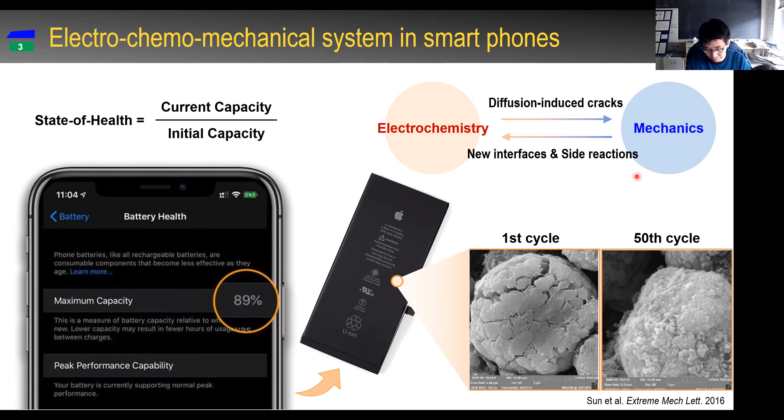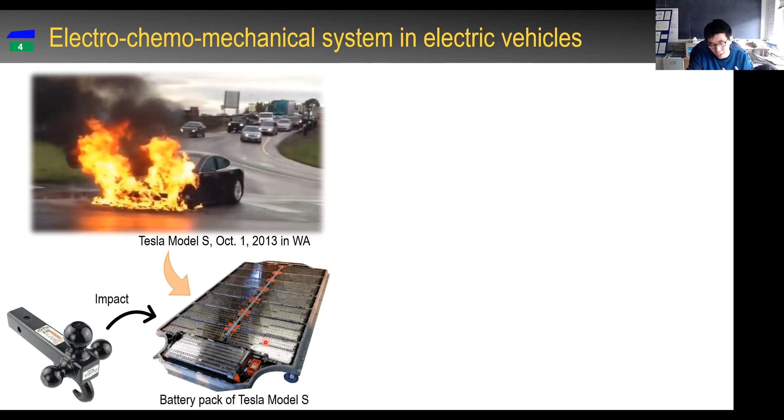Another example of an electro-chemo-mechanical system is electric vehicles. You must have seen this famous photo in headlines, about a burning Tesla, I think in 2013. What happened to that Tesla Model S? According to their report, a tow hook from another truck hit the bottom of the Tesla car, and several batteries deformed, severely damaged, causing an electric short circuit and thermal runaway.

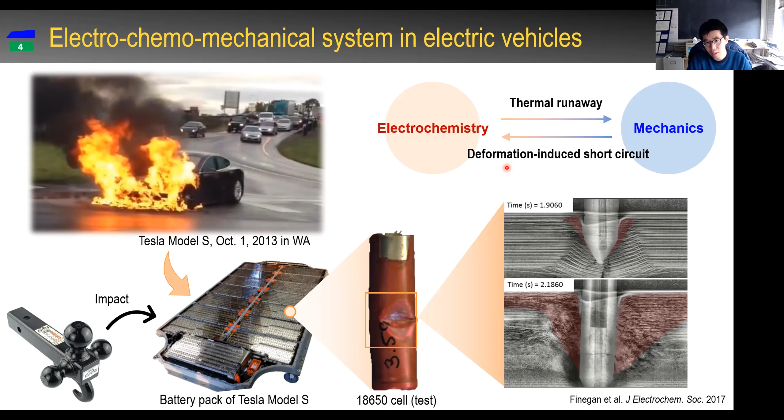So in this case, it's also mechanics and electrochemistry interacting with each other. Mechanical deformation happens first, and that deformation induces a short circuit, and there are side reactions of electrochemistry, causing thermal events and uncontrollable thermal events called thermal runaway. It can also go back to mechanics, like thermal events causing other severe large deformation of batteries. So again, in this case, it is the interaction. From these two cases, I think you must have a feeling that both cases are dealing with batteries. So that's actually one of my key research interests.

This kind of system is very complex. There are three sources of complexity of electrochemo-mechanical systems. The first one is multiple scales.

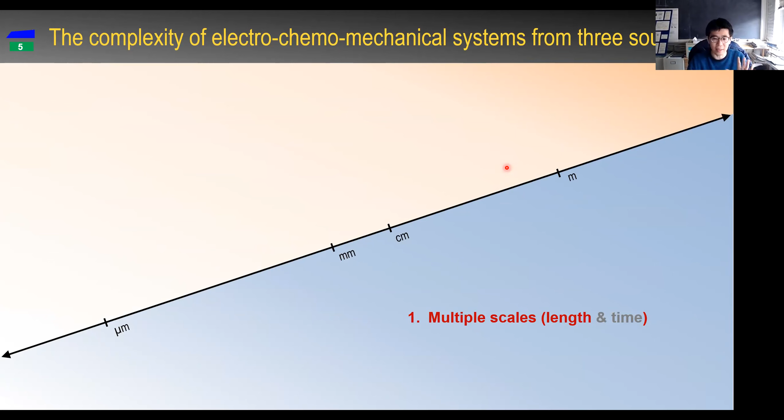Using a battery system as an example, there are multiple scales, from the nanoscale of the interfaces, to a single particle, and a lot of particles forming an electrode, what we call microscale and mesoscale battery components inside one battery, and cell level, going up to the macro level with battery modules, battery packs, and transportation. Transportation is well known as a complex system, and you can see a lot of scales here.

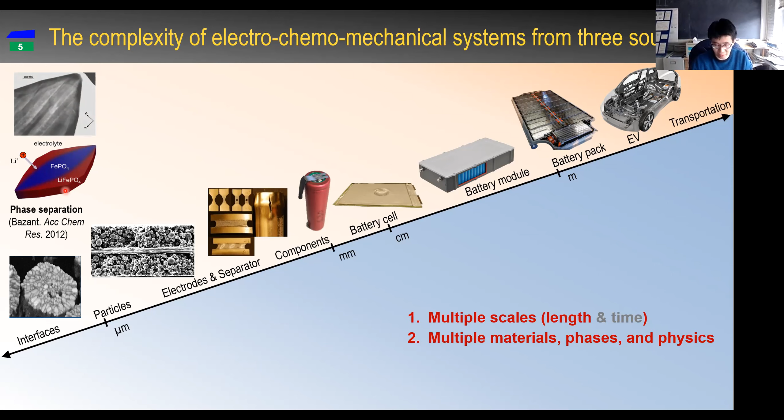The second source of complexity is multiple materials, phases, and physics. Just to name a few: at particle level, you may see phase separation during charge and discharge - one single particle is not charged uniformly, which is called phase separation. At electrode level, we can clearly define electrochemistry, and mechanically we have plasticity of granular materials - it can flow. This is another physics we want to look at.

There are much more, so it's definitely a multi-physics problem. The third complexity is usually called the curse of dimensionality in data science, meaning the complexity of the whole system increases exponentially with the number of variables and degrees of freedom. Our team is able to develop FE models at different scales, but it's very hard to develop one uniform model because of this curse of dimensionality. Today I will show you a real world example of how this curse of dimensionality is limiting us.

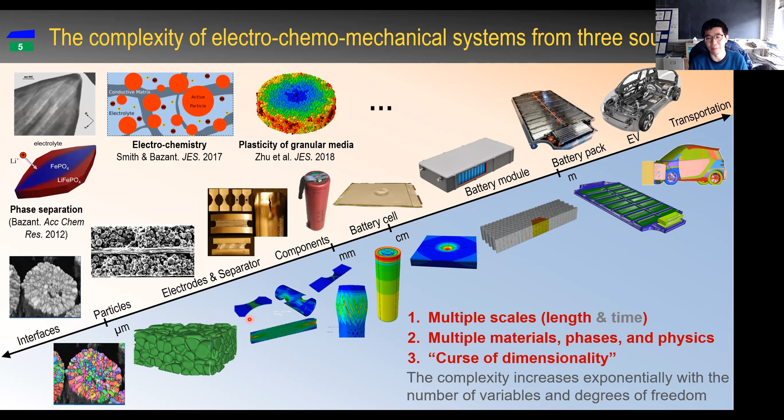These systems are usually complex. So what is the fundamental challenge if we want to characterize or engineer such systems? To me, the fundamental challenge here is the trade-off between physics and data.

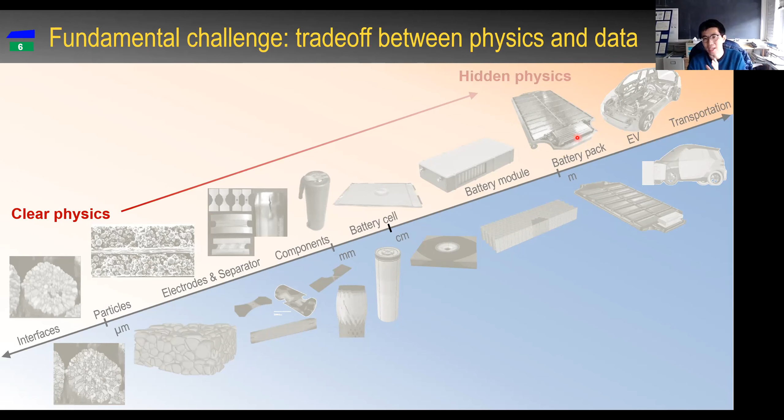As I showed you some examples of physics, you can see a lot of physics can be defined in the small range, at the nanoscale and microscale. That's actually what we usually observe - physical laws can usually be clearly defined and written down at small scales. However, at macro scales, for example car level, this kind of physical law is usually hidden and cannot be seen easily.

The good news is at macro scale we have more and more data, and big data is now a very hot area. Big data from EVs is being talked about every day. The good news is big data generation and storage is now kind of affordable to us. So data is big and affordable.

However, at micro scale, data are usually small and expensive. Just take this example of a particle - this one single image took my colleagues at NREL about one month to obtain, just a single photo of one single particle. So that's a lot of effort, meaning the data is expensive.

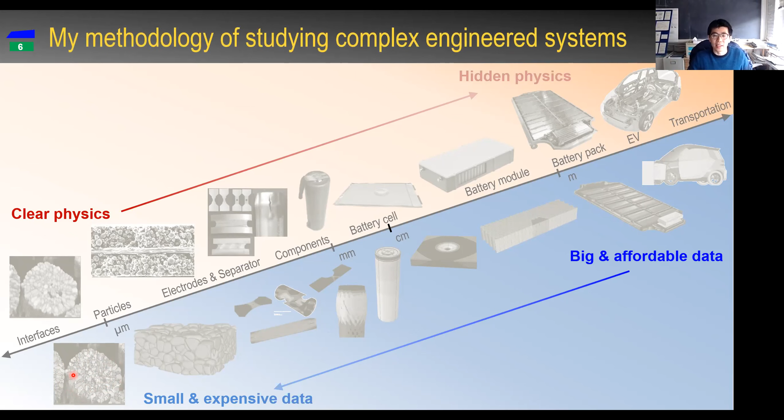My methodology for studying this kind of complex engineered system has three aspects. At micro scale, we learn electrochemomechanics or physics from small experimental data, because here physics can be written down clearly, but data is small, so we want to make full use of the data. At macro scale, we also develop data-driven health and safety prognostics for complex engineered systems.

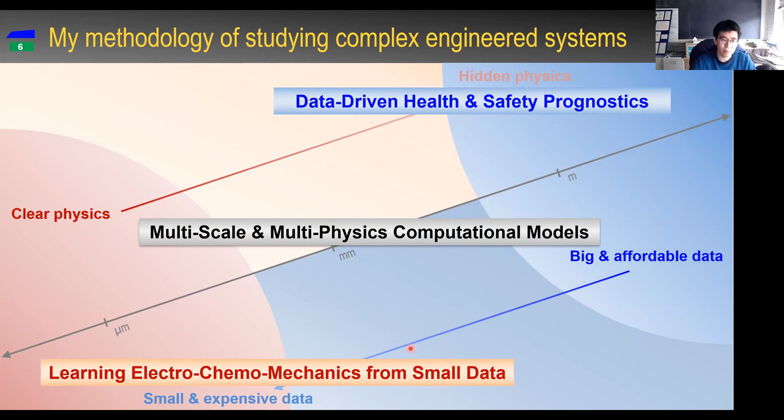In the mesoscale, the wide range, we develop multi-scale and multi-physics computational models. These three aspects are connected with each other. Usually, if we learn physics first at microscale or nanoscale, implement it into a model, and use that model to do model-based prognostics, that's a traditional physics-based roadmap - physics here, predictions at large scale.

There are other ways to do this. If we have a lot of data, we can do data-driven analysis first to get the trend, and use that to guide the design of computational models. These models can then predict mechanisms at small level. So this is a typical data-driven approach.

This goes back to the title of my talk: how to combine a data-driven method with a physics-based roadmap is a big challenge that we want to look into. In today's talk, I will give you two examples to show how these two interact with each other and how to find the balance between them.

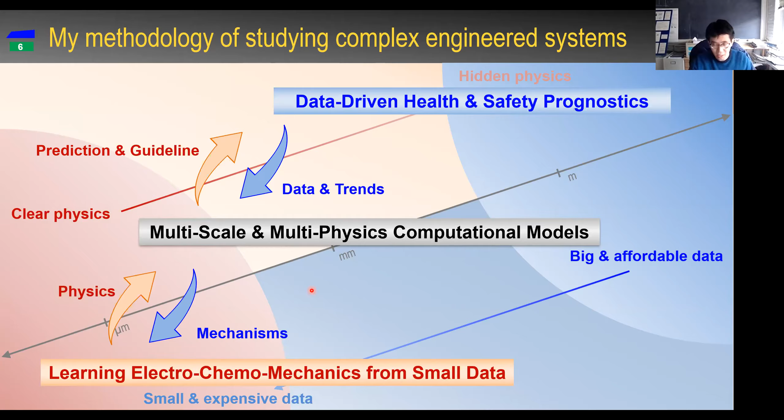The first part is from mesoscale to microscale, which involves implementing some physics into computational models of porous electrodes and the battery cell.

Before that, let's talk more about what a lithium-ion battery cell will be, or what can be modeled for a lithium battery cell.

Now in the commercial market, there are different kinds of batteries. For example, cylindrical batteries have been used by Tesla for quite a long time. This kind of prismatic cell is now being used by many cars. LG Chem developed this kind of battery, and Samsung developed this kind too. GM and Ford all use this kind of battery. And pouch cells, you can probably easily find in your cell phone.

So pouch cells have different form factors, but in terms of the basic structure, the fundamental structure is really very similar.

This is the solid skeleton of one unit cell, let's say an RVE, the smallest representative volume element. In one smallest unit, there is cathode and anode, the two electrodes, and usually those particles are attached to metal foils acting as current collectors. Between the anode and cathode there is a separator, usually a porous polymer. So this is the structure.

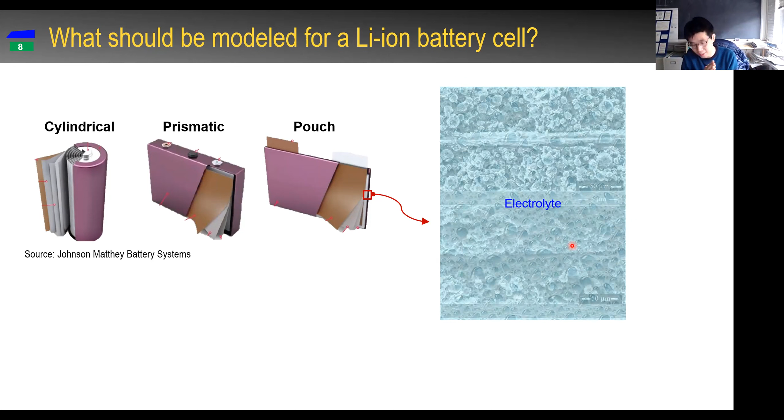All the solid materials in commercial lithium batteries are saturated in a liquid electrolyte. During charge and discharge, there is mass transfer and also transfer of electrons, so there is electrochemistry.

With this understanding, we can write down an equation, let's say the battery modeling equation. A lithium-ion battery model has three parts: one is the mechanics, the solid mechanics of layered porous media, and we need to know the flow of liquid electrolyte plus electrochemistry. So you can see a lot of physics here already.

In the first part, I will use this equation a lot to show you how I develop the model. So let's start from the mechanics of layered porous media.

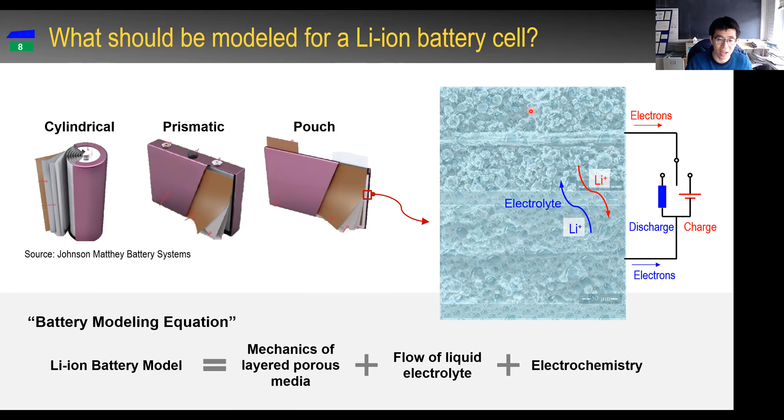To really develop a good model for this solid skeleton, we have to test a lot. We have to test all the components. There's a fancy word called learning - we have to learn mechanics from component-level testing. Our team has been working on this for about 10 years.

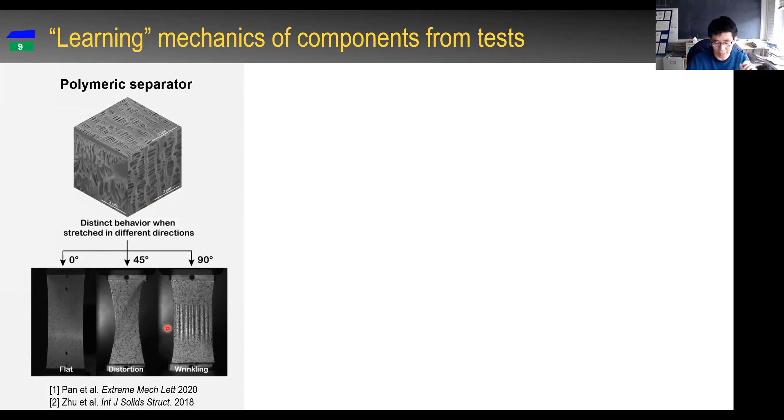Our team has almost tested everything, like the polymer separator. We did reconstruction of the polymer and tensile tests for the separator. We also tested the shell casing, the enclosure of the battery, and the current collector, which is the aluminum and copper foils.

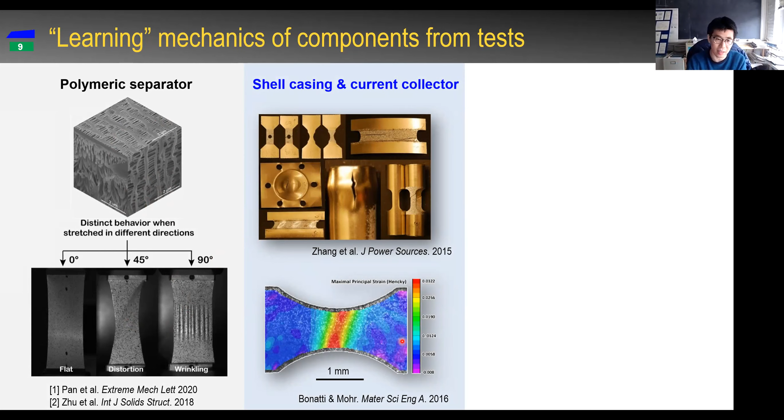Recently, my collaborators and I tested the active granular material. This is a core material in the battery system because this is where the reactions happen, the interfaces. With this testing, we can calibrate models and implement these mechanics into the RVE, the smallest unit cell.

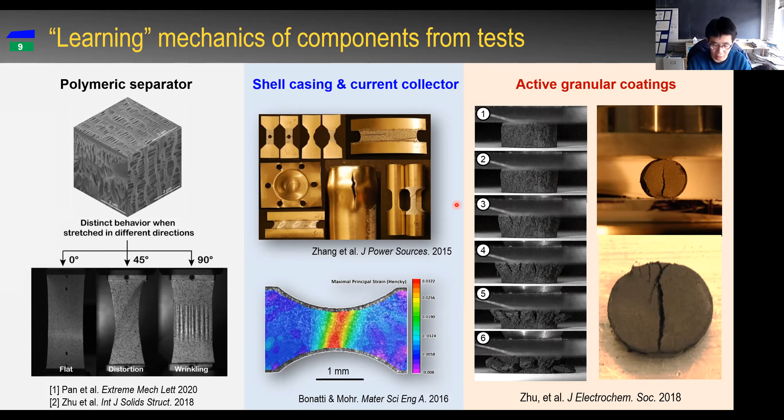This is something we developed - it's a cross-section of a model. We simply put layers together and give the mechanics into each layer. This kind of model's smallest unit is like this, and each layer means each component material, with constitutive laws given into each material.

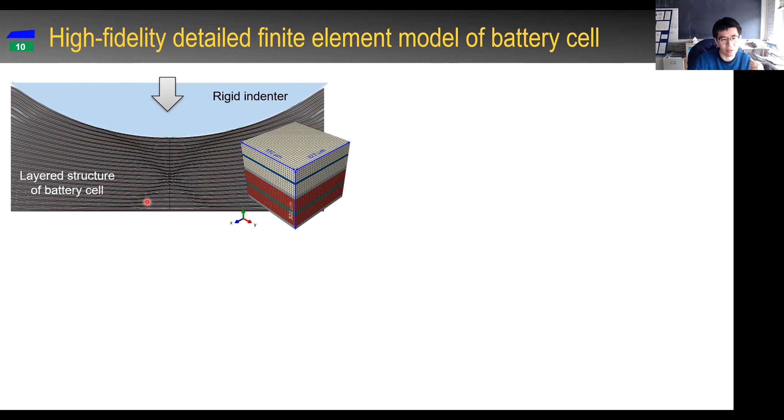This is a simulation result we call indentation. This is the indenter, a rigid indenter, and the battery layered structure deformed in this way. We can see clearly there is strain localization here, which is very interesting. We can also measure the force and displacement of this rigid indenter.

What will be the electrolyte contribution? One possibility is that if we do an indentation test, we will see electrolyte being squeezed into the neighboring parts instead of the localized region. So there will definitely be deformation-driven flow of the liquid electrolyte.

To validate this effect, we performed several uniaxial compression tests on the solid skeleton. We did 5 different loading speeds of the compression test on this unit cell, and we measured the nominal stress-strain curve.

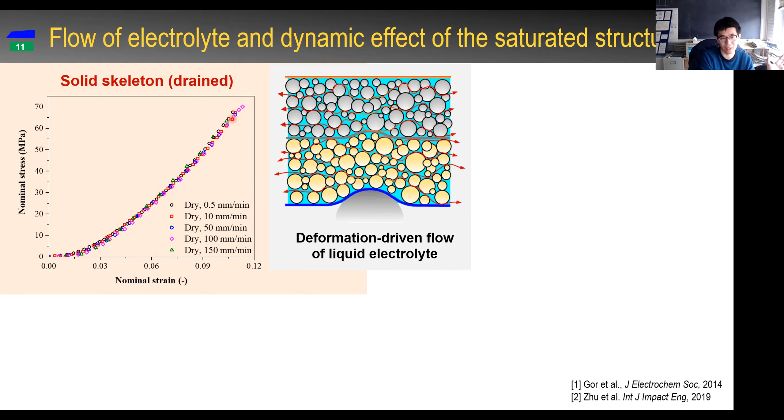We can see the dry material - the curves are almost identical, meaning there is no contribution from the electrolyte. However, if we do a saturated porous media with electrolyte, we see clearly there is a strain rate or speed effect, a dynamic effect. We put the dry curve here, and that means at a very low speed, the dry and wet curves are the same.

So in order to capture this phenomenon, let's revisit the battery modeling equation. We have the mechanics of solid, and we gave it a simplified mechanical model to capture the flow of electrolyte. Here are two simple equations, just to give you an example: how we update the stress, and we use Darcy's law to capture the flow in porous media.

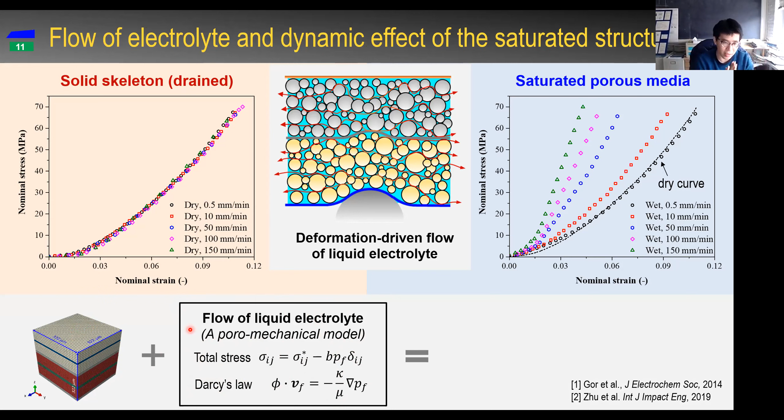There are many more equations that I'm not listing here, but simply putting these two together can give us some very good results, for example for simple geometry like uniaxial compression. The dashed lines in this picture are what we obtain analytically, and we have very accurate predictions of the strain rate effect. However, if we want to extend it to more complex geometry, using computation software like ABAQUS, it cannot continue to give us a good result.

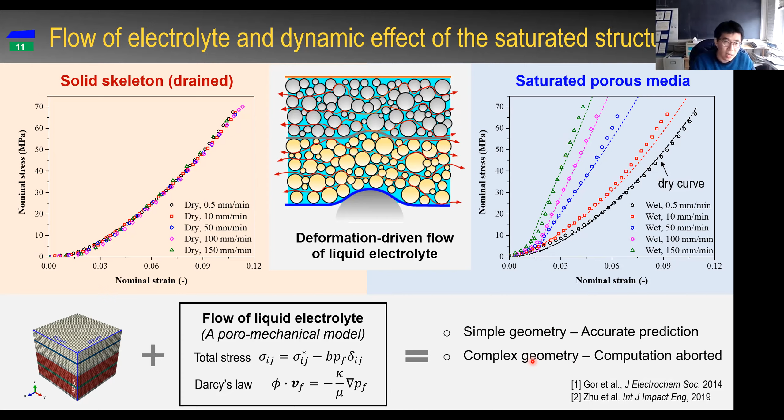Okay, and how about electrochemistry? As I said, in the real world during charge and discharge there will be electrochemistry. One simple example is diffusion - the state of charge, meaning how much of the battery is charged and how much lithium goes and gets stored in the anode side, and this is the battery.

During charge discharge, one clear observation is that the thickness of the cell will change. So we use the DIC, digital image correlation method, to measure the thickness change of the battery, and we see that at 30% state of charge there is almost no deformation yet. However, at 100% state of charge, we see a severe displacement field. So how do we model this kind of thickness change of the battery cell?

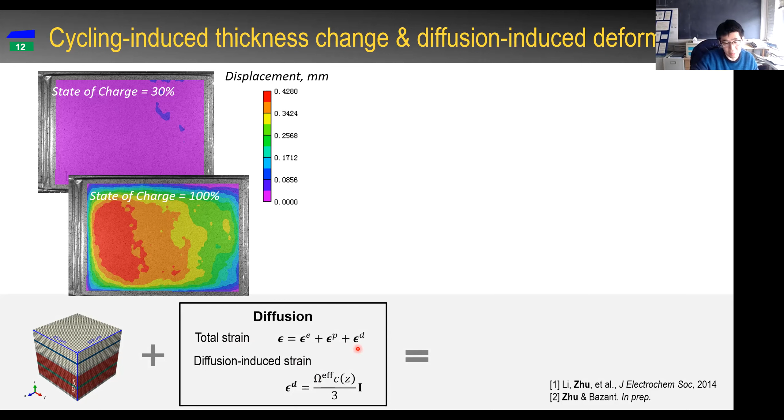This is a task for us, and we now implement some diffusion equations into the solid mechanics model. Again, this is part of the physics, part of the equations here. The decomposition of the total strain is elastic, plastic, and diffusion-induced strain, and the diffusion-induced strain is correlated with the concentration of lithium ion in different layers.

So in this way we can give predictions. Here are the predictions - the x-axis is time during charge discharge. This is one charge discharge cycle; here I showed 5 charges. The gray dots are the SOC, state of charge, and the blue and red curves are the displacement curves. You can see during charge discharge the thickness of the battery is changing, where red is experimental and blue is our model prediction.

So overall, the trend is good. However, there are a lot of deviations between experimental and model. So let's say the prediction is satisfactory, considering that our diffusion model is quite simple and basically 1D. So the prediction is understandable - the error here, we know where it comes from.

However, if we want to extend the model to cell level, to the whole battery cell, again the computation aborted - we cannot continue the computation. Okay, these are two examples of how we put more and more physics into our mechanical model.

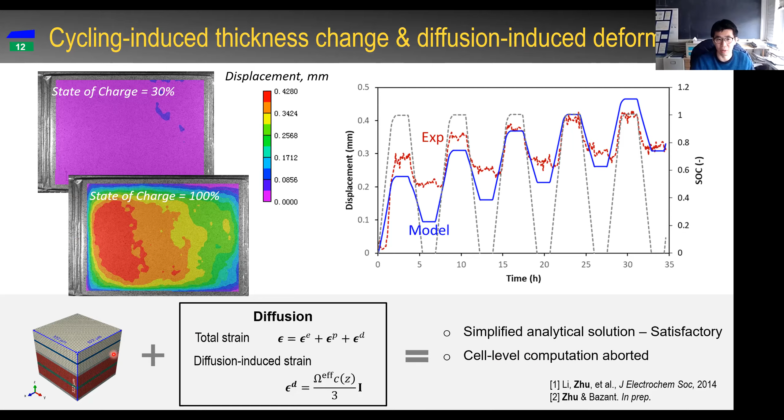And here's a summary. Let's put a very short summary here, revisit this equation: the battery model equals mechanics plus flow fluid and electrochemistry. We just showed that in the mechanics part, our mechanical model works perfectly. However, once we add more and more physics, it sometimes works, but only in very simplified cases. The more we add, the more difficult the computation becomes.

So that's exactly the curse of dimensionality - there are more and more dimensions, degrees of freedom, and other variables, so the computation task becomes very difficult. Think about putting everything together - even a simple diffusion equation or flow equation will make the case even more complicated. So we can anticipate there is actually no way to do such a high dimensional computational model that captures everything with our current computational capability. That is clearly a very daunting task for us.

So we started to think about if we can replace some of the modeling work with, for example, sub-models, independent sub-models, because most of the complexity till now comes from the mechanics side. Can we put it as a surrogate model? Let's say an analytical model.

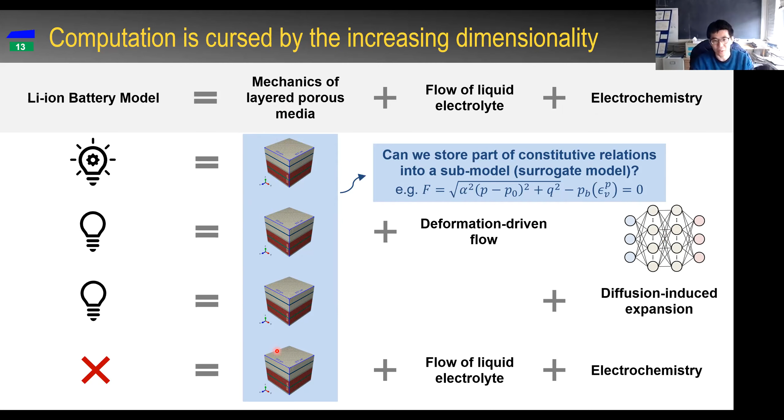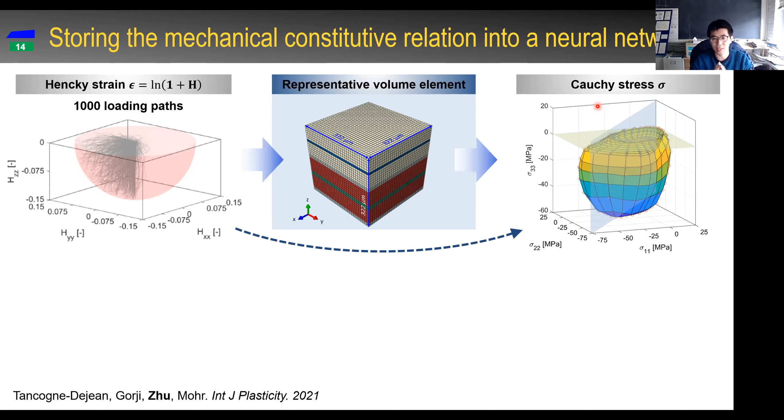We use this RVE to generate 1,000 loading conditions, 1,000 loading paths into this RVE, meaning we give it a strain and measure the stress in 3D space, sigma 11, sigma 22, sigma 33. In this way, we have the stress strain relation, 1,000 histories, and we trained a neural network to help us capture this stress strain relation. This is actually the recent work of my colleagues.

So we developed two LSTMs with 200 neurons, two hidden layers and 200 neurons. That's actually a lot of parameters, 440K parameters. That's a daunting number, I think. But anyway, we figured it out and trained this long short-term memory unit to help us directly bypass the calculation of RVE and directly predict stress from strain.

And clearly there is some advantage. It's like now we are able to store all the mechanical constitutive relations into one equation. The stress strain curve can be trained independently. We don't need to calculate it in the multiphysics model now, and it serves as a lookup table for the overall battery model.

That's the advantage. And the biggest advantage is the computation cost of the solid mechanics part is greatly simplified after training. So the training procedure still has a lot of work, but during use it is much reduced, smaller computation cost. Okay, then let's look at how powerful this neural network is performing.

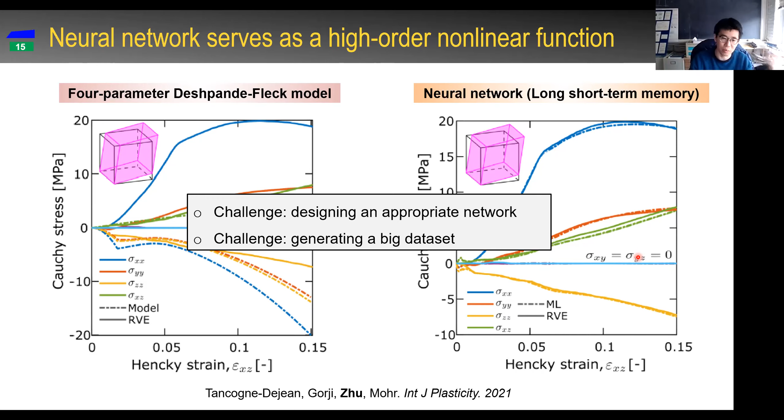Only mechanics is still fine because we can run a lot of simulations at the same time, and it's quite easy to process. However, if we add another physics, let's say flow of fluid into the RVE, we definitely don't want to do so many simulations. So in that previous example, we only used neural networks as a data-driven method, purely data-driven model, so we depend on big data to give us output.

However, sometimes we cannot do so many simulations, so we started to think, can we make use of another method? For example, what else do we have? Physics, right? We know part of the physics, for example, the flow of electrolyte. We know the equation. Can we put the equation into the neural network model so that it becomes a so-called physics-informed neural network model? In this way, we will not depend on such big data.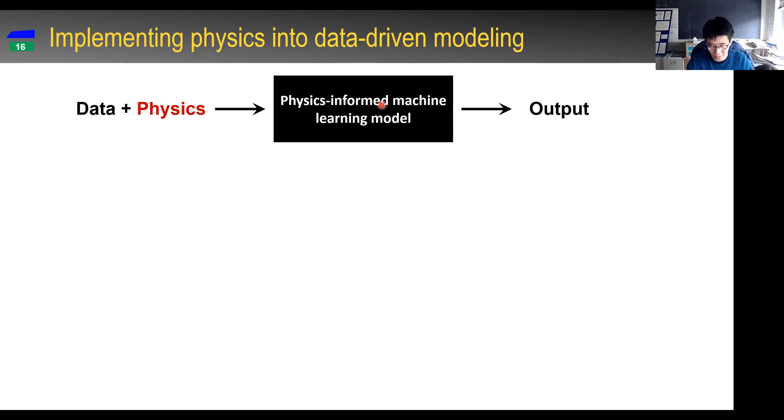Of course, I'm not the first guy to think of such a method. There are already other researchers with this kind of similar idea. One of the ideas is physics-informed neural networks. For example, I think Raissi's paper probably is one of the first who used the idea of physics-informed neural networks, or PINN, to solve the Navier-Stokes equation for incompressible flow.

This is their example, and they can predict, for example, the pressure field of their flow. And recently, Lu Lu's work at Brown, now currently at UPenn, he developed even a library for how to use this kind of PINN to solve different equations, for example, the diffusion equation.

So actually the logic here is quite simple. We use a neural network to represent the solution of this equation. The x and t are the two independent variables, and u is the solution. We use the neural network to approximate the solution, and we put the PDEs and the boundary and initial conditions into the loss function. By minimizing the loss function, we can get the prediction of the parameter of the neural network, also the solution of the equation. So that's how this physics-informed neural network works. It's more like a PDE solver.

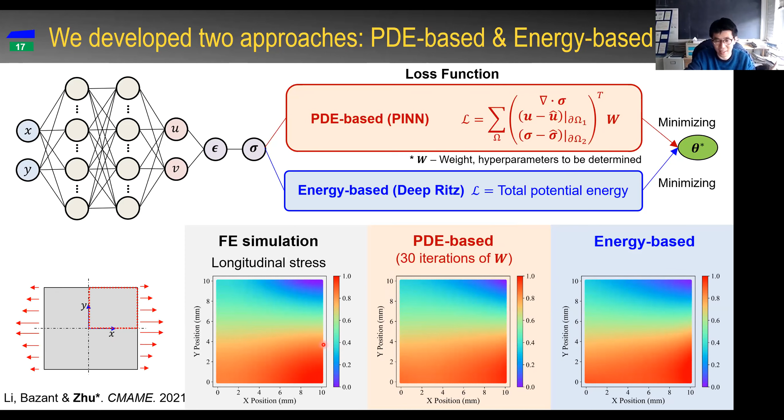Now we have so much knowledge in how to use the physics-informed neural network. We want to apply this to structure-fluid interaction in batteries. So again, we can construct a neural network to approximate the solution of our system. The variables here are the coordinates and time, and the output is the displacement field and the pressure of the fluid. The known physics here is the mechanics of the solid phase, and we have the flow of electrolyte. As I just said, the equations are all known to us, so by minimizing the loss function, we can predict, for example, the pressure field.

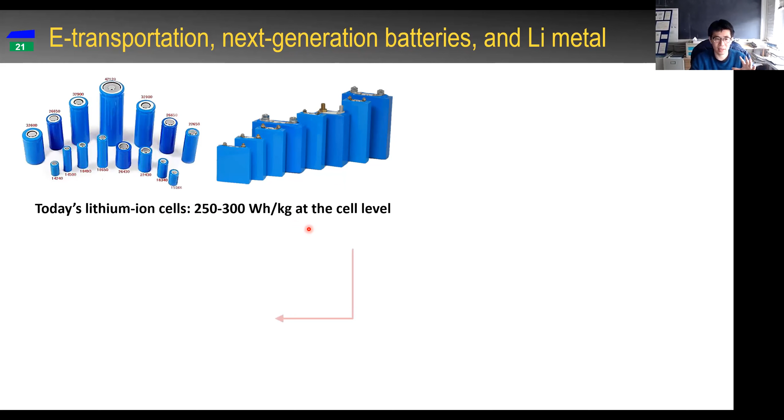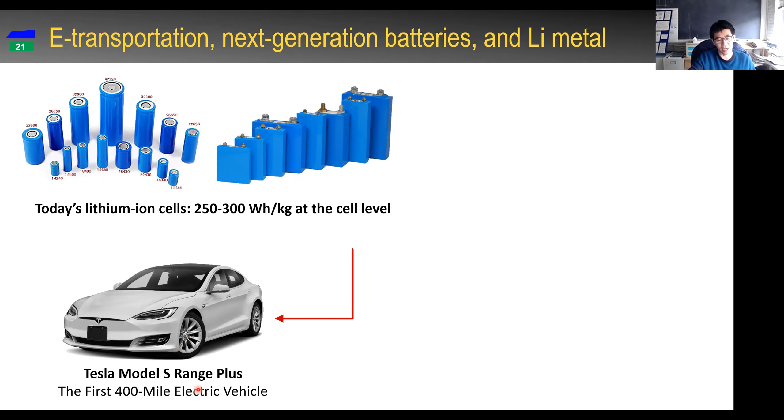Why pure lithium? Today's lithium-ion battery cells, as I just showed you, the cylindrical cells and prismatic cells, are all approaching their upper limit of energy density at the cell level. With this current level of energy density, we can definitely develop cars like Tesla's — probably one of the biggest ranges human engineers have achieved, 400 miles for an electric vehicle, just announced last year. With these cells it is also possible to develop electric flight, though this is still very experimental. It took its first flight last year, designed by NASA — the Maxwell series, the X57.

If we want to extend the success of this kind of electrification to the future, like commercial airplanes, the challenge is still on the battery side. So people are now thinking about how to increase the current energy density of batteries.

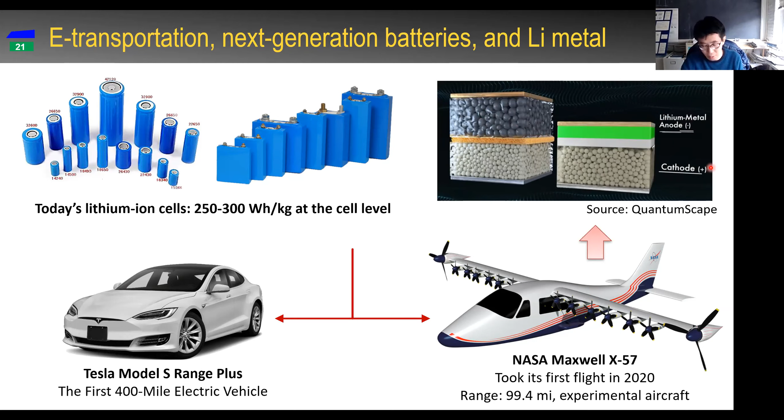One way is to replace the graphite anode with a lithium metal anode, so there's a lot of research going on in lithium metal anodes. For either solid state batteries or lithium metal anodes, it is very important for us to understand the mechanical property, or the electrochemo-mechanical property, of lithium metal. That's why we started to look into lithium mechanics.

Here is some current existing research. In this plot, the x-axis is the length scale at which the experiments were performed, and the y-axis is the yield stress. A lot of studies have been performed in this range and in the bulk range.

For example, recently, very excitingly, there was a paper in Nature Nanotechnology from a group led by Georgia Tech. They performed very exciting nanoscale compression of pillars, or whiskers, of lithium, which actually extended this plot into the nano range. So we now have a better understanding of this trend. However, we can still see there is a gap — in the micro to mesoscale range, there is a gap in understanding lithium mechanics.

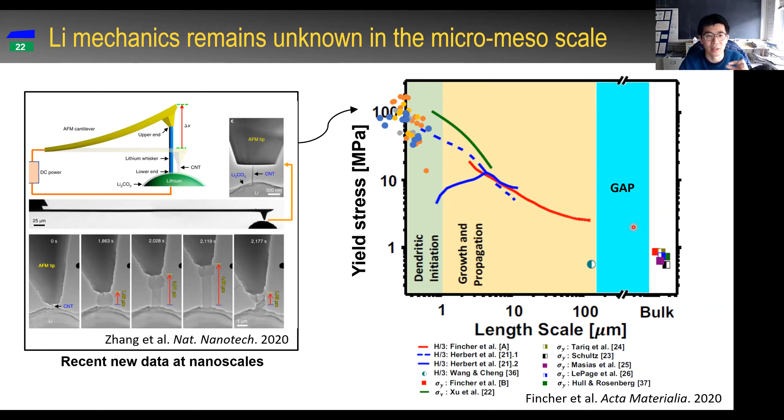That's the motivation of this study — we want to fill this gap, because it's very important: the thickness of the lithium metal inside the cell falls in this range, and the lithium surface roughness is also in this range. A lot of things fall in this range, and we must have a lithium mechanics model for it.

Now, as I said, lithium metal mechanics in this range is unknown. However, what we do know is the general mechanical framework. Let's say this is a metal material — we can guess that we can apply the general continuum-level constitutive equation to this lithium metal. These are two key equations.

This is called the yield function. It is basically a function of stress, strain, and strain rate. This is the very general form, and there are unknown parameters, unknown coefficients — let's assume every parameter is unknown. So how can we learn this mechanics?

Human brains are very good at learning, so we usually control variables. For example, we do a uniaxial tension test. In this test there is only one non-zero term, so it is constant rate and gradient free. We plug this stress into the model, and everything simplifies — other parameters just drop out — and we can learn one parameter at a time. This is a very comfortable way for our human brain to learn these models.

Of course, now we have computer algorithms, and computer algorithms are very good at sensitivity analysis of multiple variables. So we can now develop a complex material test, where none of the stress components are zero. We can plug this in, but it will not help us simplify the equations.

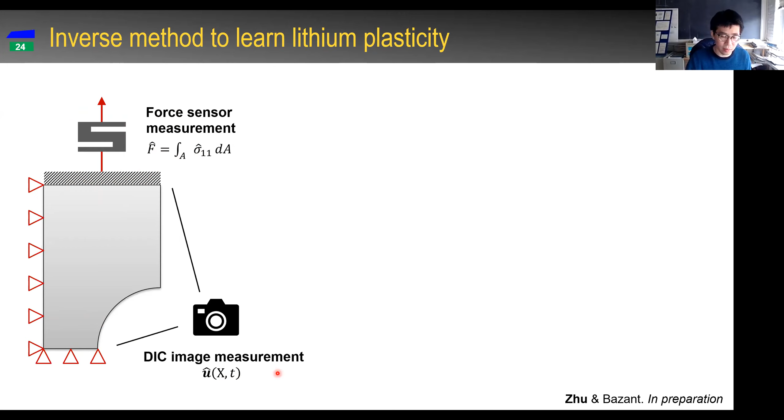We started to develop this inverse method and apply it to lithium plasticity. For example, in a tensile test we measure the force, which is the integral of stress in one cross section, and we use image data to measure the displacement field. We put this into the inverse learning algorithm, using a known general quadratic yield function and hardening law. We put in the initial guess, design a plasticity subroutine, use an FE model to solve it, and obtain the stress and strain field in the simulation.

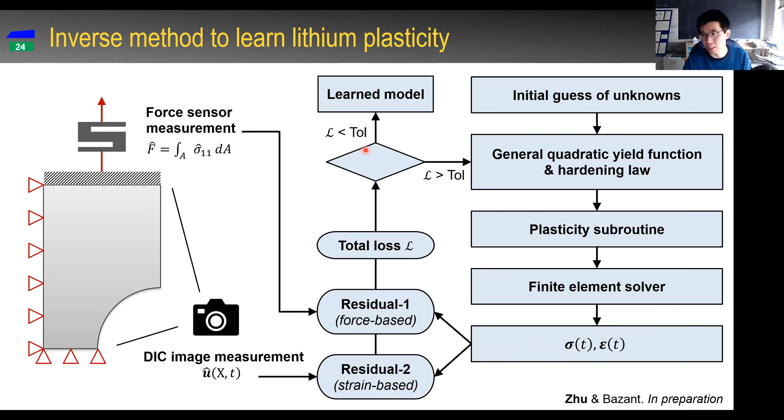There are two residuals: force-based, where we compare simulated and experimental force, and more importantly, strain-based residuals, which we minimize to get the learned physics and mechanics. So now we have the algorithm.

Where does the data come from? That's another important thing. A very smart master student in our lab developed safe laser cutting technology, which is very challenging because lithium is very active. This student helped develop a simple but powerful tool to laser cut thin lithium, and designed a chamber so we can test very tiny samples of pure lithium. Here are the test results.

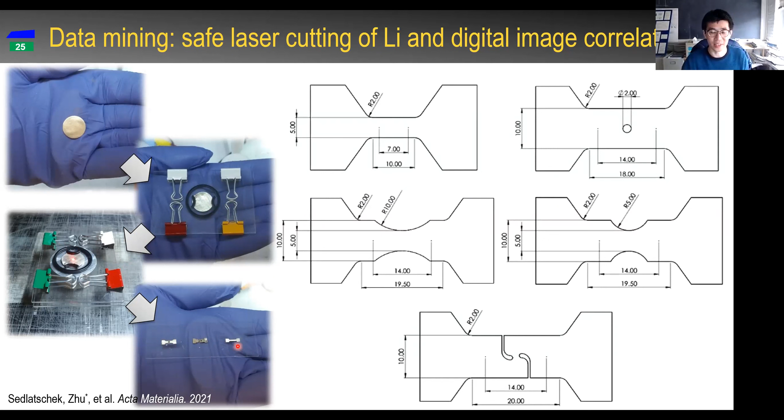We designed 5 different loading conditions, and all tests were performed under a camera so we could capture the strain field. We can see there is strain localization in each test, and the fracture clearly, with the help of the DIC system.

We applied all the data into the algorithm and inversely got the prediction for each single test: central hole, notch tension, different notch tension, simple shear, and uniaxial tension. We used 4 of these for training and one uniaxial tensile test, the simplest one, for validation.

These are what we learned: the A matrix, which stands for anisotropy. This is very interesting - this is what we learned, and we can of course do additional tests to measure this coefficient. These two are very close to each other.

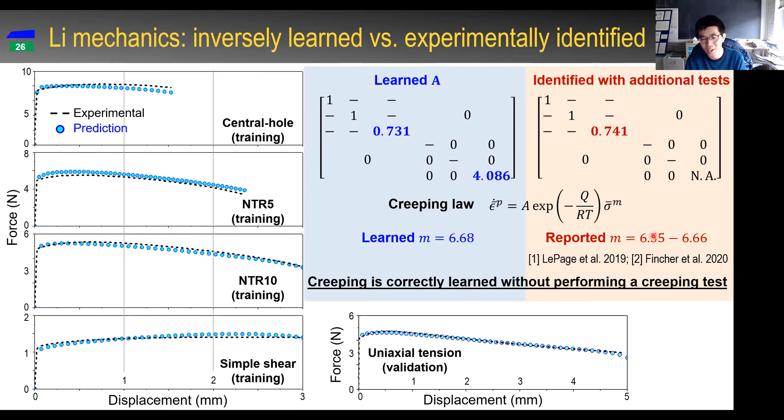More exciting is that in the simulation we put in a creeping law, a rate-dependent law, into the material model, and nobody actually performed a creeping test. We learned the creeping parameter, and this matches what has been reported in open literature. These two parameters are again very close to each other. This shows the power of inverse learning - creeping was correctly learned without performing a traditional creeping test. This is the exciting power of inverse learning.

After we learned this lithium mechanics, what can we do? We developed, through a collaboration with University of Houston, Yao's team, work on solid-state batteries. This is the solid electrolyte we have from the collaboration, and we performed image-based reconstruction. There's a long story in this aspect as well, but I won't go into details.

We can reconstruct the microstructure and turn it into an FE simulation. This is a lithium plate with our learned physics applied, mimicking the real-world manufacturing procedure, where there is usually a displacement-controlled compression. We do this simulation with one side fixed and the other under displacement control. The solid electrolyte is a sulfide-based solid electrolyte, which is elastic plastic, and all the particles can move.

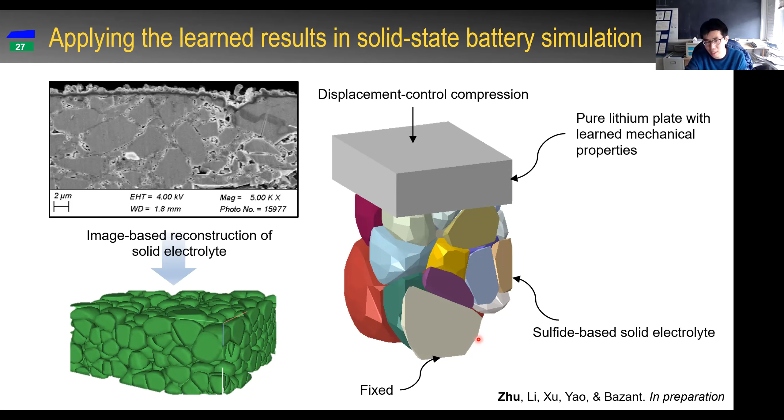Here are the simulation results - two videos. The video shows lithium being pushed into the solid electrolyte, and here is a cross-sectional video where we can see the penetration. We can see clearly how lithium flows, like a fluid, into the solid electrolyte. This is what we learned from the creeping and rate dependence behavior. Here is the simulation result after we take the lithium plate out.

And we can see clearly there are some penetrations. This kind of penetration is very critical to battery safety because it can cause short circuit.

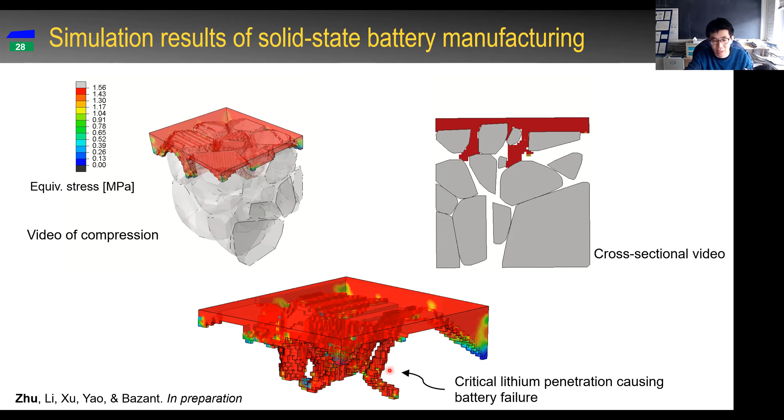Okay, so here are some summary about part 2 of inverse learning. I just showed how the algorithm-assisted inverse learning approach can be applied to lithium mechanics, and we developed an experimental data set to help train this algorithm-based inverse learning algorithm. We also show that the lithium mechanics that been learned can be used to model solid-state batteries.

In the future, we are still looking into, because I didn't mention, we make use of optimization methods in MATLAB, and now we are using Bayesian optimization. As we know, Bayesian optimization is now very powerful and a very hot area for black box based systems. But now we are still just using a small part of Bayesian optimization, so in the future we will try to make more use of it to further reduce the experimental cost.

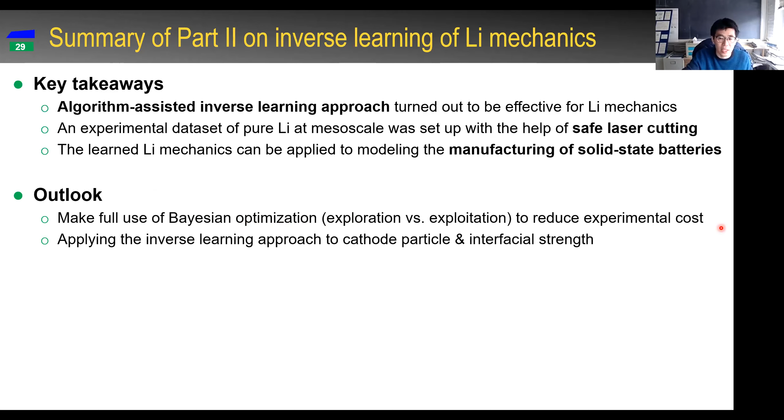We also currently are applying the inverse learning approach to a cathode particle model. This is a more complicated structure, and we hope to learn the cathode particle physics and also the interfacial strengths, which are not directly measurable, still unknown to us.

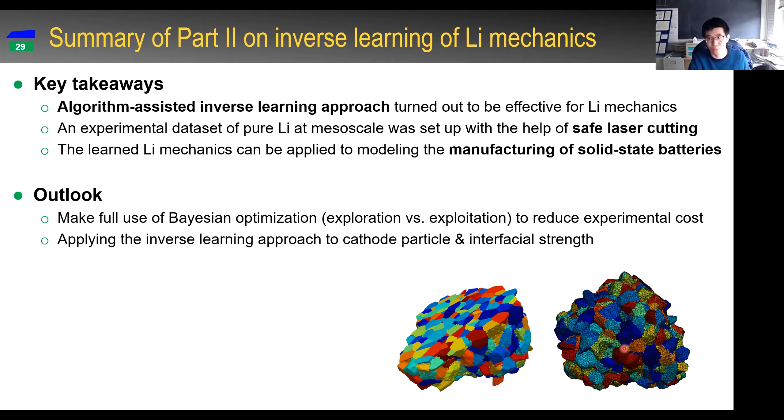Okay, so I think my talk has focused so much on batteries, and you may feel like why we are talking about so small an area. Actually, I want to close my presentation by giving you more real-world examples of chemo-mechanical or electro-chemo-mechanical systems.

One example is COVID-19, the viruses. So virus endocytosis, how the virus goes into the cell, is actually a typical example of chemo-mechanical. There are chemical potentials outside the cell and inside the cell. To model this as a mechanical system, we have to think about chemomechanics.

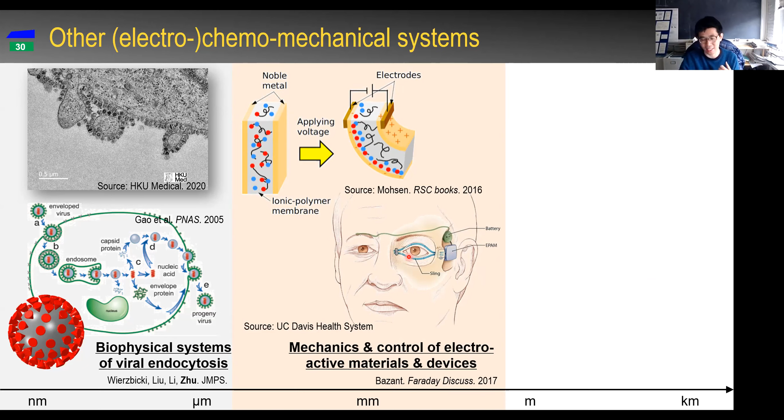A lot of people now are developing electro-active materials, for example, to design artificial muscles. These are some examples where we can use electric signals to control mechanical deformation - another very exciting area.

And also don't forget large scale systems. We have, for example, oil reservoirs. In the oil reservoir, you can see clearly there are porous media and water, oil, multiphysics at large scales. That's very exciting for us, to learn to apply chemomechanical models into this kind of system.

So all these systems, you can see that the methodology I presented today can be used for these systems as well. Okay, at last I want to thank our team again.

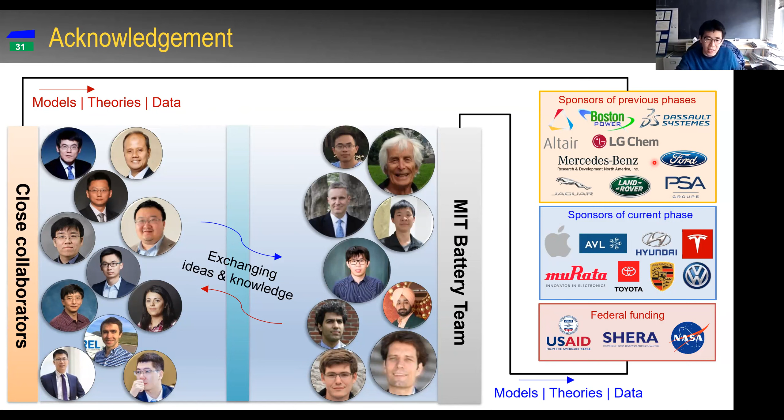I like this team a lot because we are working exactly like a battery cell. We are one electrode at MIT, and our collaborators are another electrode, and we exchange ideas and knowledge. We output models, theories, data, and we serve the community of applied mechanics and applied engineering. So that's really exciting to me, and thank you for your attention.

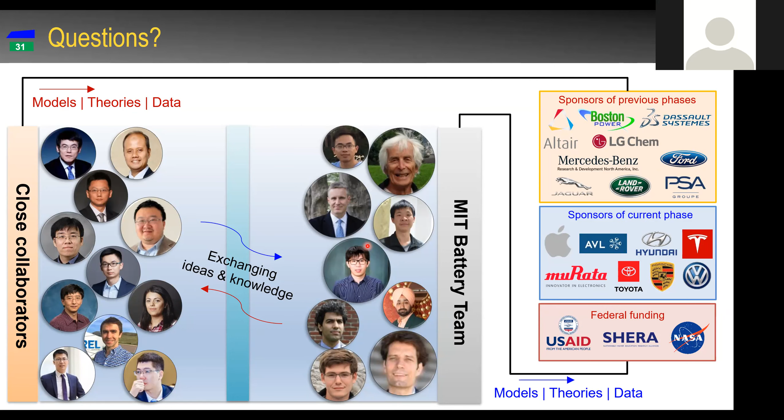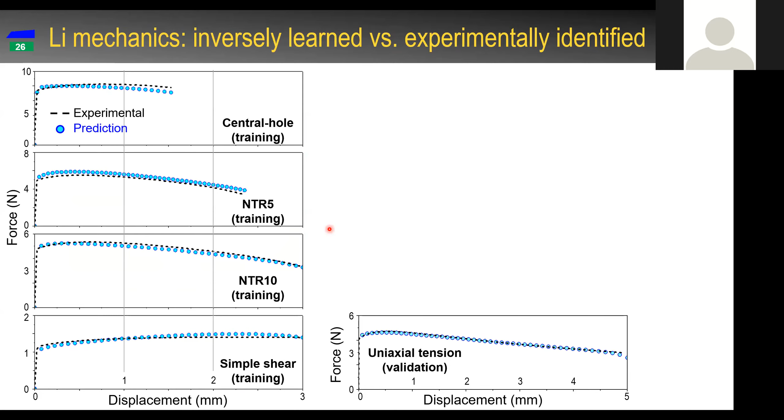Thank you, Dr. Zhu. I have a question on the physics-informed neural network. I was playing around with that specific algorithm myself as well, and I encountered some problems when training the model. As you must know, there are several different tasks in training PINN, which is to satisfy the boundary conditions, initial conditions, and the governing equations, right? So when you are training your PINN, how do you balance out all those terms so that all the tasks can be minimized?

Sorry, you mean balance which terms? Can you clarify? Specifically, in this equation, you can see the last term has multiple different equations to satisfy at the same time, right?

Oh yes, I think I got your point. Let's go back to that one - this will be more intuitive, right? So yes, that's a very big challenge. I think the difficulty of using PINN is really a painful thing for me as well - how to balance, how to give the weight function.

Now our team is doing optimization. We simply optimize the parameter, but definitely it's very hard to coordinate all the terms. In some cases, which I didn't show today, the boundary condition will fail. There are actually some publications from Jianxun Wang's team at Notre Dame addressing this - if you are using it, you must know their team.

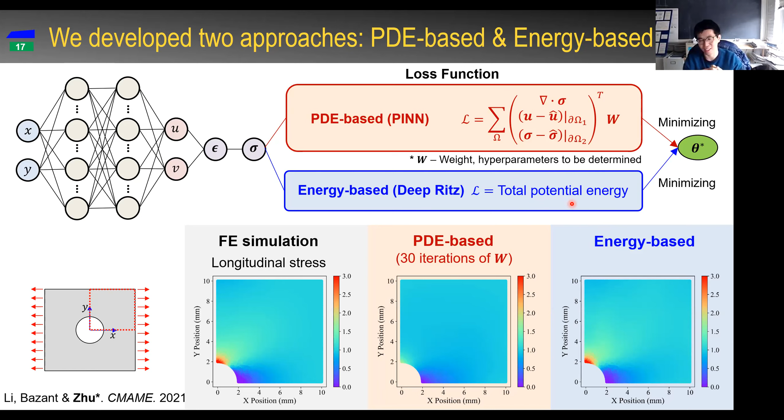That's a much easier way, if you'd like to see. And if you are working on thermodynamics, I would strongly encourage you to use energy-based methods, so you can bypass a lot of things. For example, in phase field fracture, there's a free energy term to minimize. If you have such a term, just use energy-based. I think that's my suggestion.

Thank you for that. I actually have a second and third question, sorry. So the second question is, when you're training a PINN, do you solely use all those collocation points in an unsupervised way, or do you have more simulation or experimental data to guide you and initialize the model?

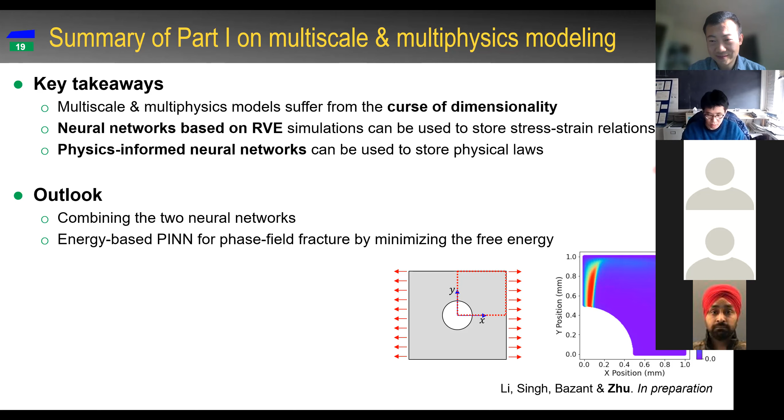That's a great point. That's what we learned, because two years ago we were also new to this area, and our learning curve was super long. That's why we tried energy-based methods, which look more physical. Think about the difference between energy-based and PDE-based: in energy-based, the weight function has some physical meaning, so your loss function becomes energy.

So we suggest thinking about the energy terms in each case, like virtual energy. If we can use energy to quantify and give you the initial guess of this W, that would be a very ideal case, I think.

I feel like energy-based functions to transform all the different terms into one equation may be a good solution to this specific problem.

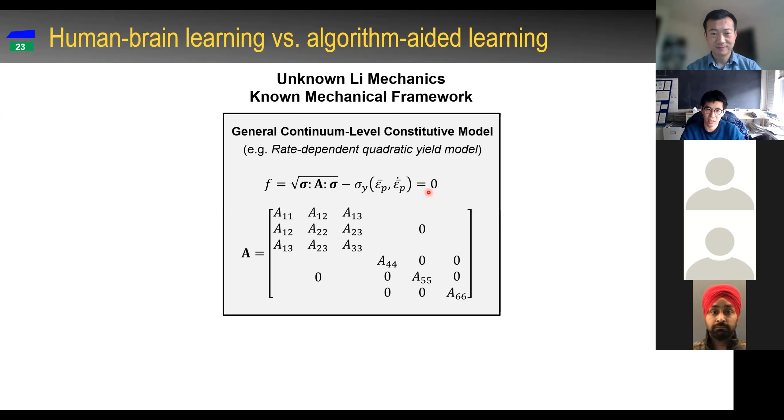Yes, but anyways, the third question is, I realized you are doing some kind of inverse problems in the second part, right? I also remember that in PINN, you can also use it to do the inverse problem to find out some of the terms in the equations. Have you ever tried such an approach? Is it working?

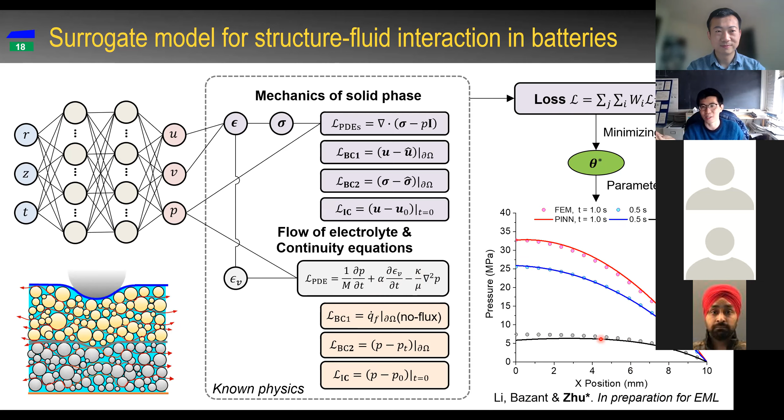Exactly. You see, I didn't mention it because the purpose of our study is not like this. You can see the prediction here is kind of a way of inverse learning. The parameters, let's say alpha and kappa, are unknown, so we first train the neural network, and then use a kind of inverse method to calibrate the data and these parameters. But the purpose of our study is not to use it purely as a PDE solver.

FE simulations can do much better for that. So to us, neural networks are more like a function to store information. I don't want to use it to solve PDEs. I want to put the physics and data into this neural network so that later we can just take it, without having to calculate again and again. After training, put it there.

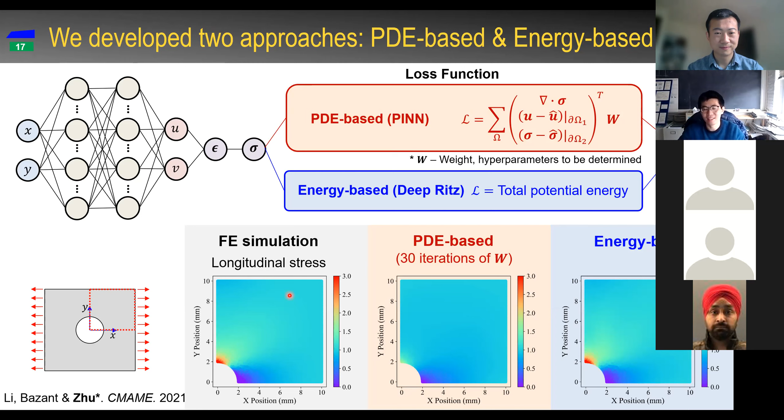That's the big idea. I see, so if I understand correctly, you're using these neural networks to store all that information so you can minimize the time and cost of calculation, storage, and training. Is that correct? Exactly. For example, with this model, I really don't want to calculate again and again. Just calculate once, put it there.

I see, thank you. Thank you for your questions, very relevant. All right, great.